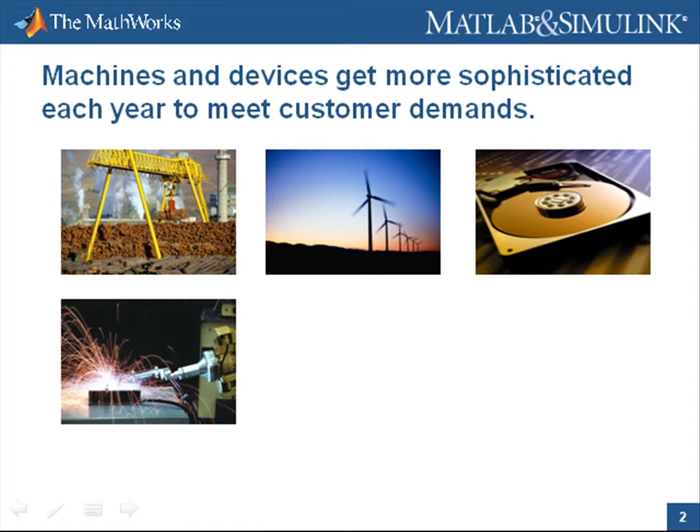So what is early verification and how can it help you improve your control system performance? Well, to answer this, let's step back and first talk about the problems you are facing in developing control systems. Machinery and devices across many different industries continue to become more complex with the need to differentiate themselves from their competitors. This differentiation often comes from the use of embedded control systems.

Here is some data taken from a study of companies developing electromechanical equipment performed by the Aberdeen Group. Table 1 here provides data supporting what I just mentioned. You live in a very competitive marketplace where your customers want better products while your management wants you to develop them faster and cheaper, and the differentiation is often accomplished by putting more software and electronics into the product.

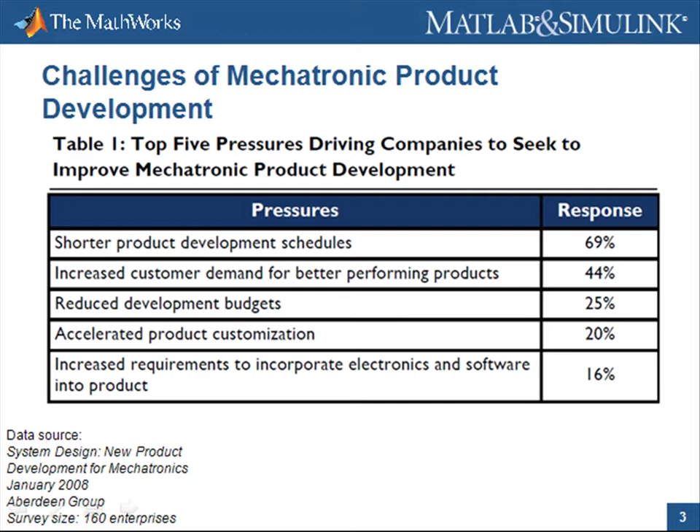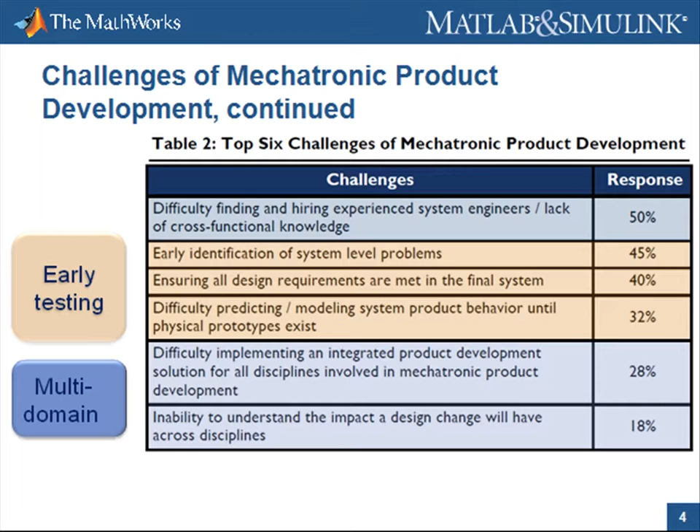Table 2 here is interesting because it illustrates the challenges you have in designing your electromechanical systems. These challenges can be reduced to two main points. Finding mistakes early in the development process is no easy task, and designing a multi-domain system is hard to do. So why do we need to find errors early, and why did people list it as an important challenge? Here is a study by NASA that answers these questions.

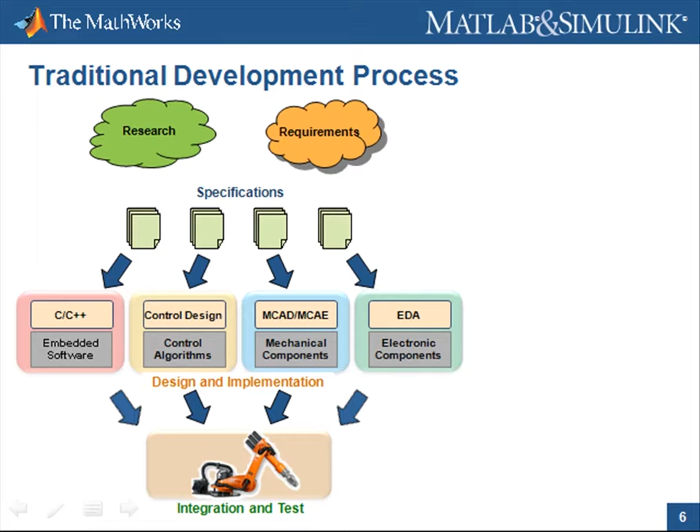So let's look at a simplified representation of a traditional development process to understand why it is difficult to find errors early in designing multi-domain systems. The complexity in systems is dictating more complex specifications, and since teams rely heavily on document-based specifications, it gets harder and harder to interpret them correctly. The microcontrollers or PLCs are programmed directly from the specification, but this is done separately from the development of the control algorithms. These separate workflows can result in problems if the tools used don't connect to each other.

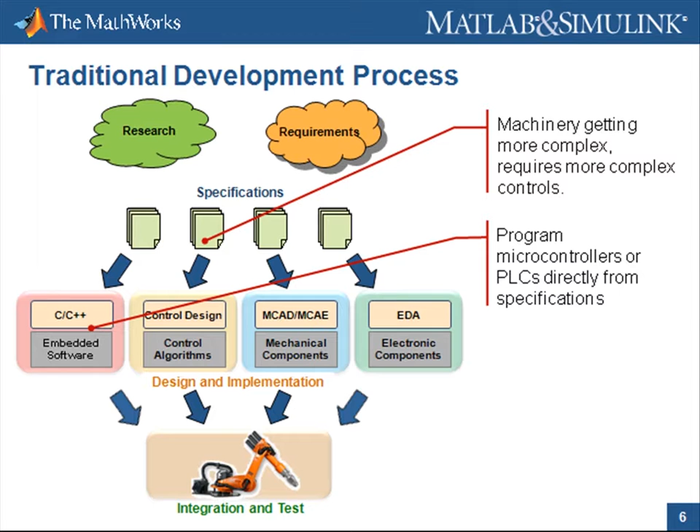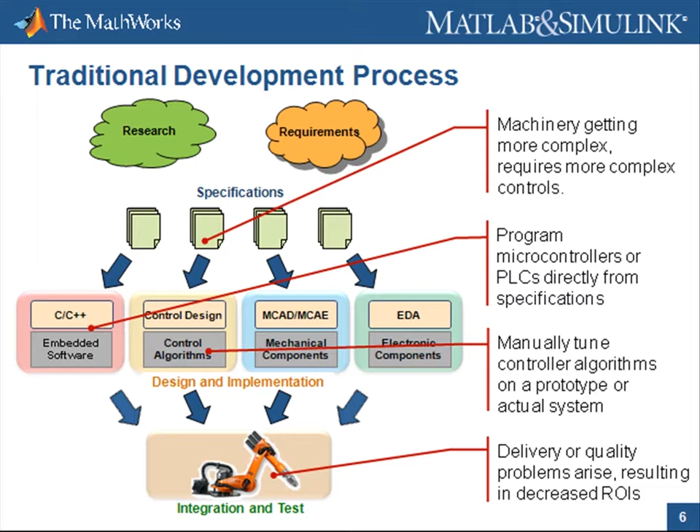The controller algorithms are manually tuned on a prototype or on the actual system, and the integration and test phase is where the problems show up, since this is the first time the system is integrated. The result is the errors are found late and they are expensive to fix. So let me introduce model-based design and explain how it will help you detect errors early and therefore allow you to design innovative products with higher performance, faster and cheaper.

Model-based design is a computer-aided engineering solution for mathematically describing how the equipment will work. The key to model-based design is that you start with a block diagram that mathematically models the system behavior. By being able to model the system behavior, you can then use dynamic system simulation to try out your ideas. First, you get an understanding of the overall system that you are building early in the design, and with this, you can try out different design alternatives and do initial what-if studies that would be too risky to test directly on the system.

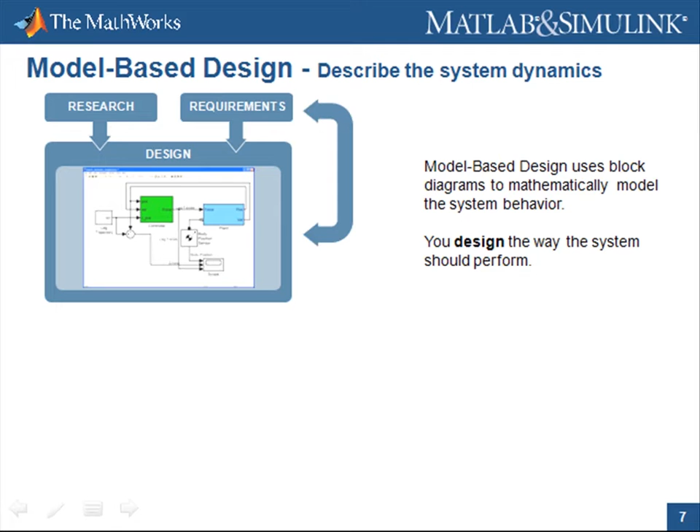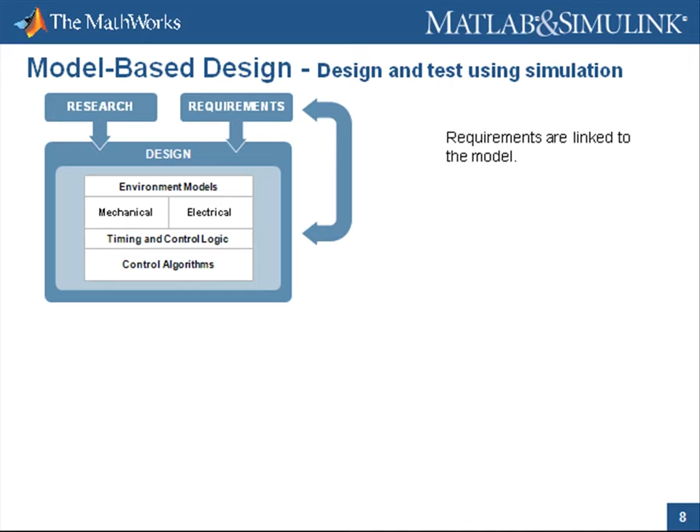For engineers, block diagrams are easier to understand than text because they are visual. In essence, a block diagram complements the text requirements to communicate design intent. Actually, you can take the text requirements that you have and electronically connect them to your model to show which part of the model implements which requirement. The model is elaborated to include all the different elements of the design and operating conditions. You can reuse existing intellectual property and engineering data from existing designs and tools that you use, such as CAD, FEA, and SPICE. The model is not only a graphical representation of your design, but it can also simulate. Therefore, we say the model serves as an executable specification.

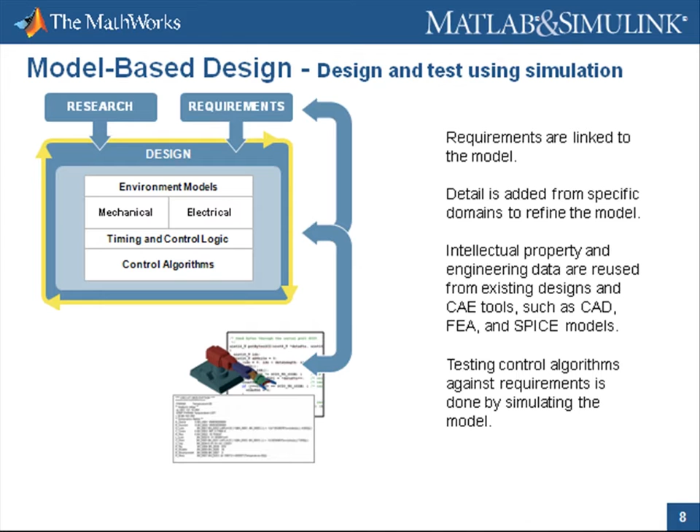So the fact that the model is visual, easy to understand, and executable removes the ambiguity from interpreting these text requirements. We can start testing the design and requirements through simulation of the system model very early in the process. And we can then rapidly iterate on the design, continuously testing and ensuring that we are meeting our requirements and that our requirements are correct. All the work that we spend in building and developing these models is not wasted because you reuse this model or components of this model for real-time testing. You can automatically generate code for the control algorithm and test that control out in real time against some prototype hardware that you have.

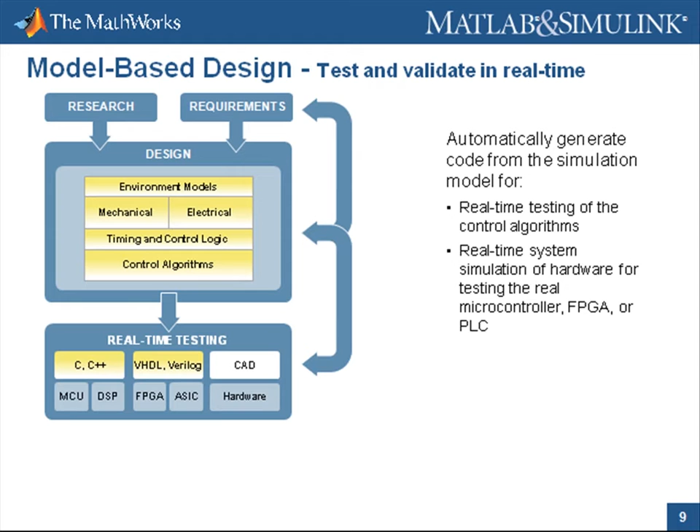Additionally, if you do not have all your hardware available at once, you can simulate aspects of your plant system as well by generating code for those components. This testing, of course, continues to check that the requirements are being met. You reuse the tests that you have already established for the model, and you can continue to rapidly iterate on your design. Automatic code generation is also applicable to then implement your final controller in either software for a microprocessor, hardware for an FPGA, or even a PLC environment.

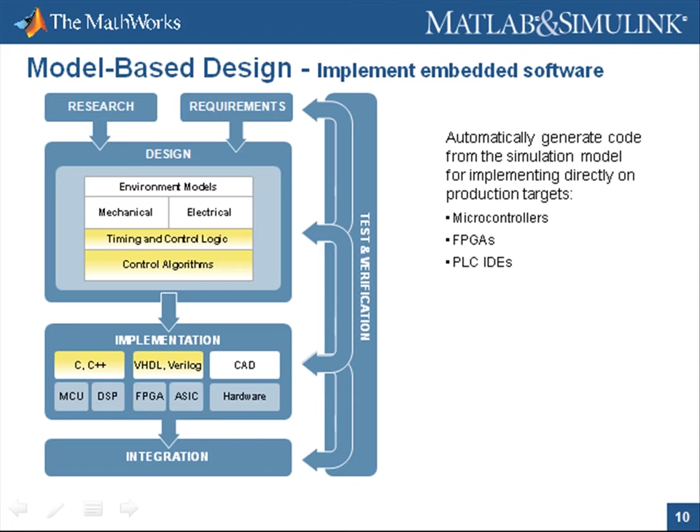This highlights 4 aspects of model-based design that can be summarized as follows. It provides a CAE solution for multi-domain system-level development of embedded controllers. It is using mathematical models to describe the system-level behavior of your complex equipment to improve your design. You can automatically generate code for real-time testing and implementation of your design from these models. And finally, testing is done continuously to let you find errors and conflicting requirements early in the design where they are cheaper and easier to correct.

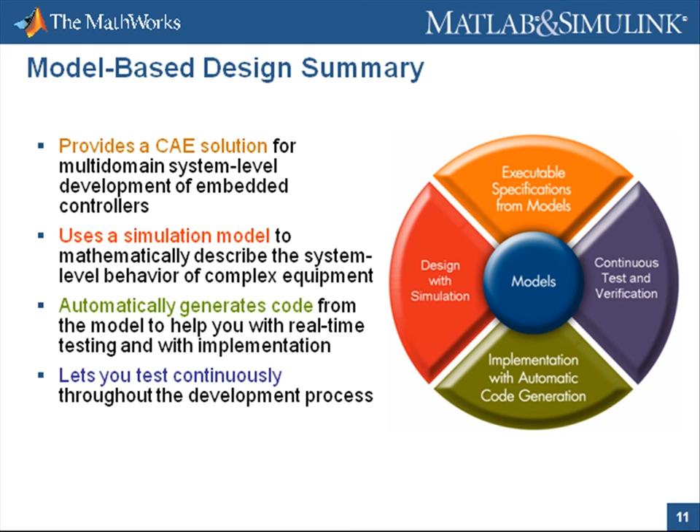So the overall value of model-based design is as follows. First, it allows you to explore unique features through rapid design iterations and conduct cost-effective design trade-off studies through simulation. Quality is improved by preventing errors from reaching the hardware stage and by just overall reducing the rework in your design. Cost is reduced by minimizing the number of expensive physical prototypes required and in general reducing overall testing costs by finding errors early in the project when their testing is less expensive. And finally, time to market is improved by being able to get designs right the first time and by accelerating the overall development process.